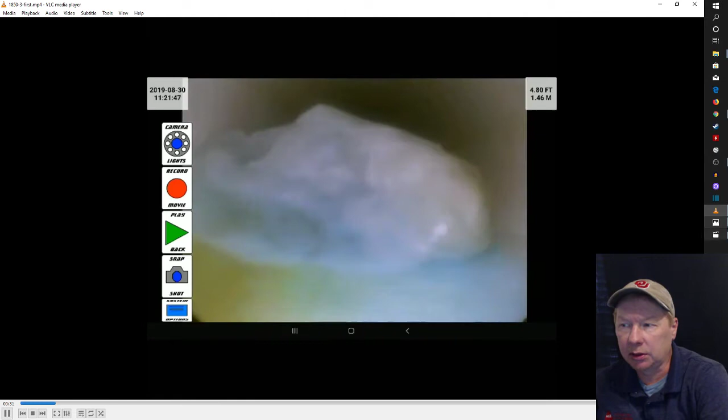Initially, the first thing we see is a little bit of solid sewage sitting in the pipe, which typically shouldn't be there. We don't think too much of it at the time. There's a little bit of water sitting in the pipe too. We go ahead and try to nudge up past it. So we see water sitting in the pipe, which probably shouldn't be there. As we get to this first cross fitting, there's water standing there.

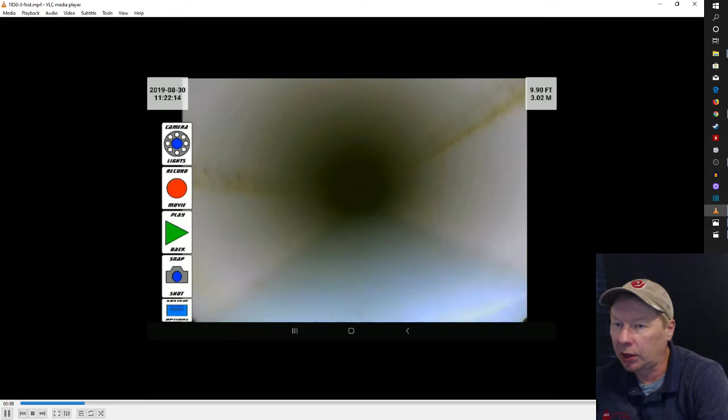As we move on up the pipe, you can see what a normal sewer line should actually look like. There shouldn't be hardly any water sitting in the pipe itself as we get up here towards what's going to be the second fitting. We're right about in here. You can see the water gets mostly out of the pipe. This is what a sewer line in good condition with good fall should look like. There shouldn't be any water standing in the bottom. The blue color of the water kind of gives us a really good indication of how much water actually was sitting in the bottom of the pipe.

So here we are, second fitting, looks pretty good, headed up towards the back.

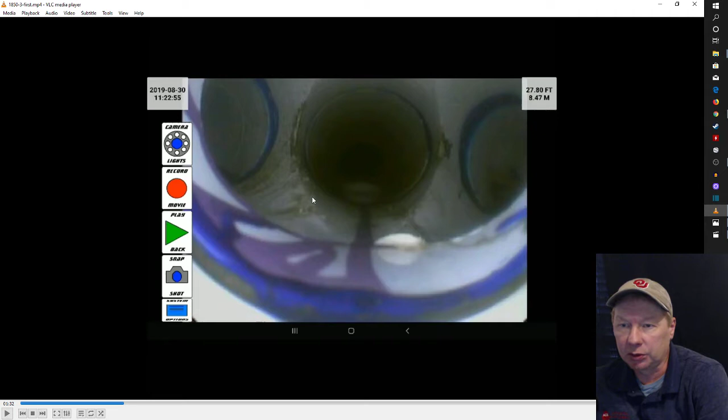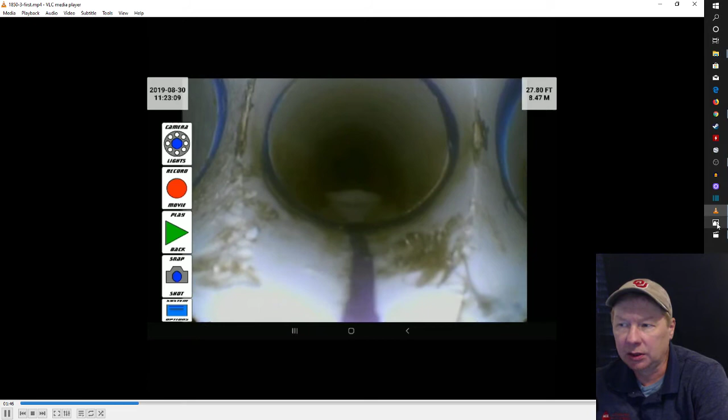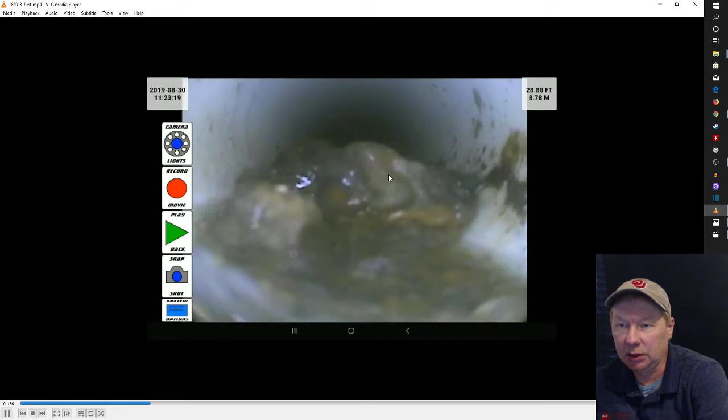As we get to the third fitting, here we are at the third one, right here. We can see it's been a little chewed up, and there was some question as to what that was. I feel like after it's been rooted so many times, that pipe is getting a little bit of chew marks in it, which really shouldn't affect anything. And I don't feel like we're seeing any effect from this, because if we go up past this third fitting, up here in the area where there isn't actually any water running through it or sewage, what we're seeing is a pretty big pile of solid waste back up in here.

So that really shouldn't ever be any water up here. You can see the water flows through these and heads out, and this is just the cleanout in the back, the only place that actually goes to.

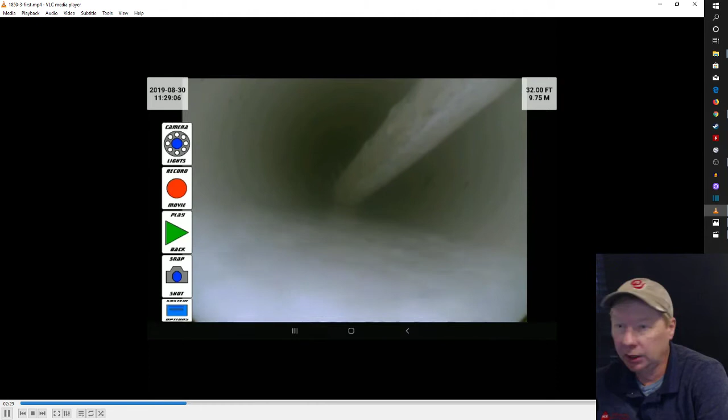So what we do is I physically go around to the back and run a hose through it to try to knock some of that solid sewage loose so we can actually see what's going on. There's my hose that I use to run down pipes. You can see we've run a bunch of water through it, trying to clean it out so we can get a better idea of what's going on here.

As we finally get it cleared out most of the way, you can see we're back at the fitting, and what we do is go ahead and flush the commode, and it washes out quite a bit of paper from that side.

It's kind of got to the point here where we can see not very much. We're thinking maybe the camera head is even causing some of that paper to stop up in the pipe here. So we go ahead and take it out around to the back cleanout, where we're going to actually physically remove it from the front and put the camera head into the back cleanout right there.

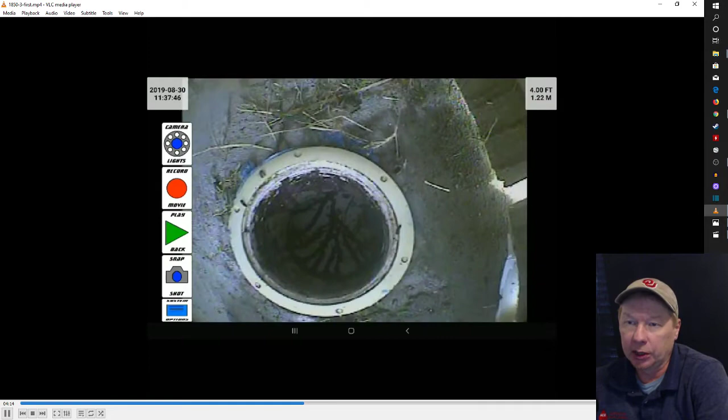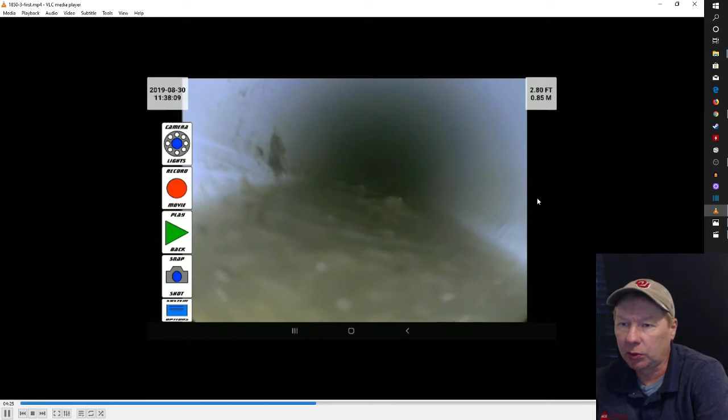So here we are at the back, headed into the cleanout. Again, headed downhill from this side behind that fitting that we're having the problem with. And we can see there's quite a bit of still heavy water, if you will, raw sewage and paper.

So I go ahead and run some more water to try to rinse that out and give it a couple of pokes with the camera head to get everything rinsed down. Again, the spot we're running the water from is in the back, and we're at the back cleanout with the camera head looking forward this time. So we run some water, try to get everything cleared out, poke it with the camera head a little bit to knock some of that raw sewage down that's been standing in the line.

Finally get it to where it's starting to clear out. As the water slowly goes down, you can see I've got it at quadruple speed here. It actually took quite a while for the water to finally clear out of this pipe. And it slowly goes on down.

We wanted to have a completely clean pipe, no stoppages, no sewage sitting in it, so we'd have a good fresh start to try to do a little bit of testing and see exactly what we're up against here. Again, slowly the water goes down. We give it a flush. Slowly the water goes down. And then we wait until it's all pretty cleared out.

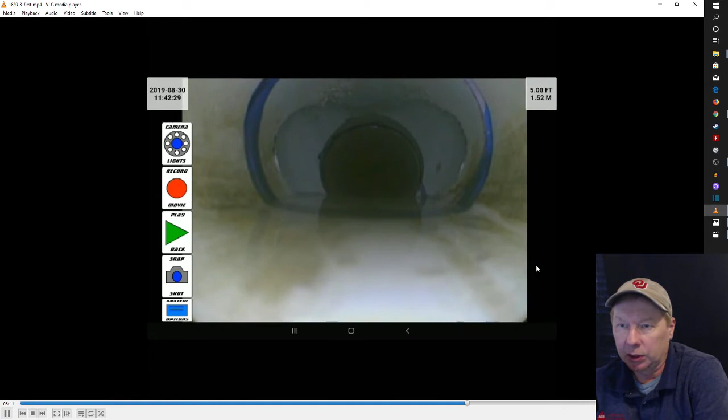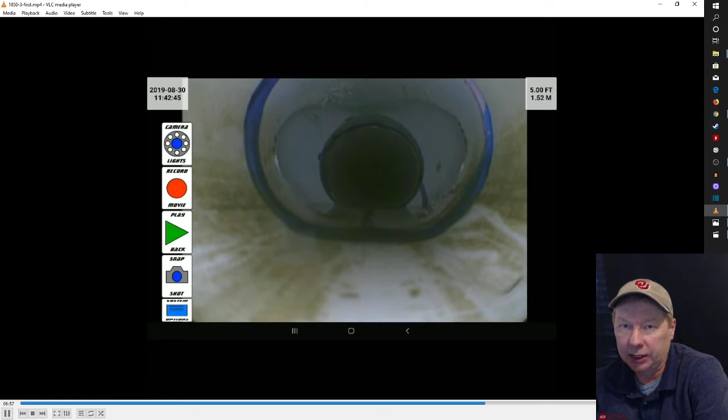So we're going to go inside and start flushing the commode with some paper in it, as a normal flush would use some paper and there'd be some solid in it. So we try to let all the water go down before we start doing our testing.

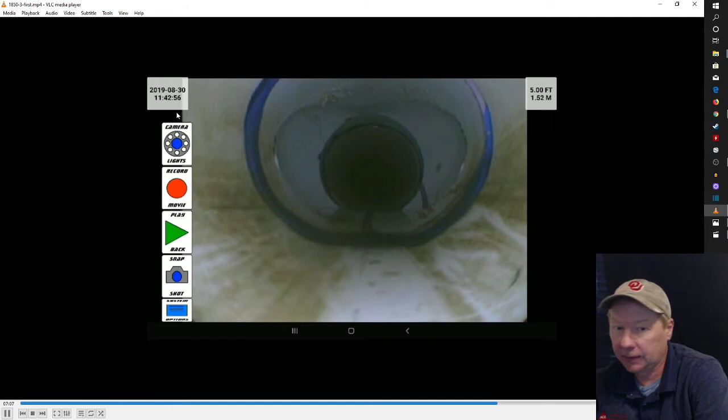It finally dries out and we go inside and flush a little bit of paper. Keep in mind that water coming up, we're behind this fitting looking this way. The water isn't coming downhill toward us, it's coming up that back fitting. This should be the highest part of the sewer system in this building, and there should never really be any water, much less sewage, into this very top part. So what we're seeing is even from behind that fitting, that water is piling up toward the camera and even back behind the camera.

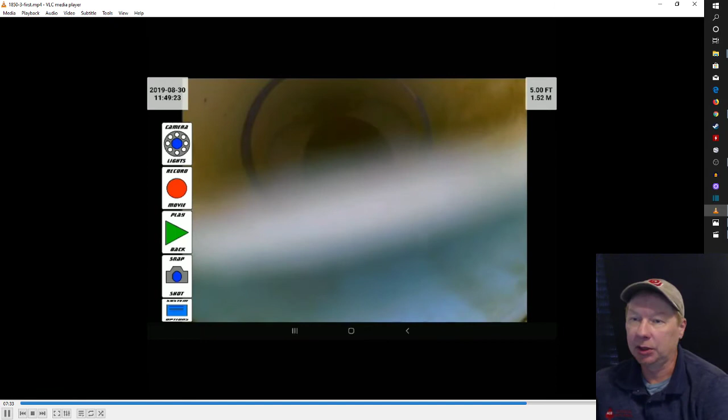As it slowly goes down, you can see I've got this at quadruple speed. It's leaving behind a little bit of raw sewage, paper in this particular case since that's all we flushed, sitting in the middle of that fitting.

So we think maybe we'll flush it again and see what happens. Hopefully it'll wash this paper down if we give it another good flush, as would be typical in a sewer line. If any does stop up there, like at the front we saw, it typically will go ahead and wash on down.

So we go in and give it another flush. After all the water goes down, as would be typical of normal operation -- most people don't flush over and over right after each other -- so we let all the water slowly go down out of it. Again, this is quadruple speed.

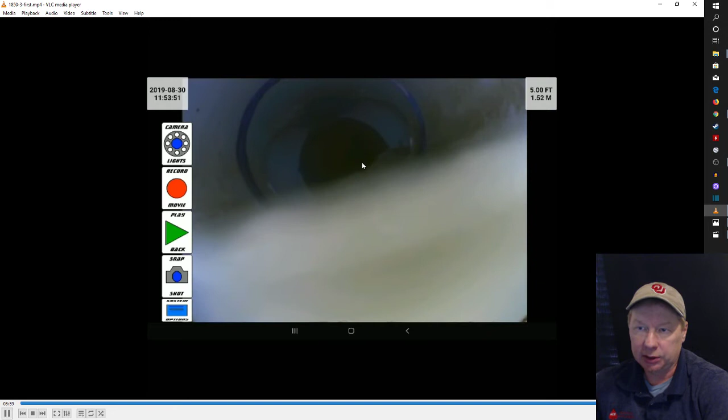So we give it a second flush, hopefully it will wash it down, but instead we actually see more solid stuff caught up in this fitting.

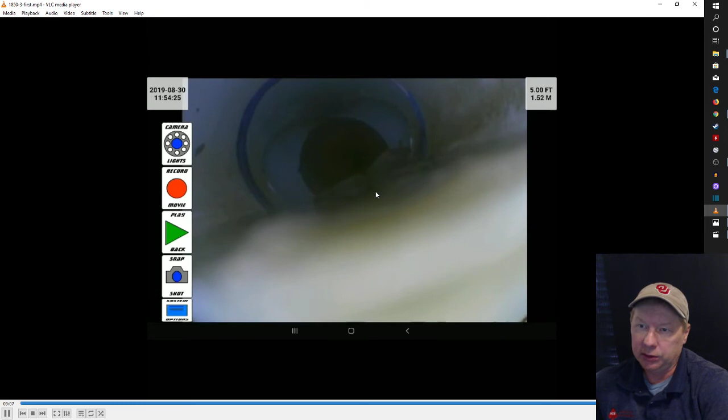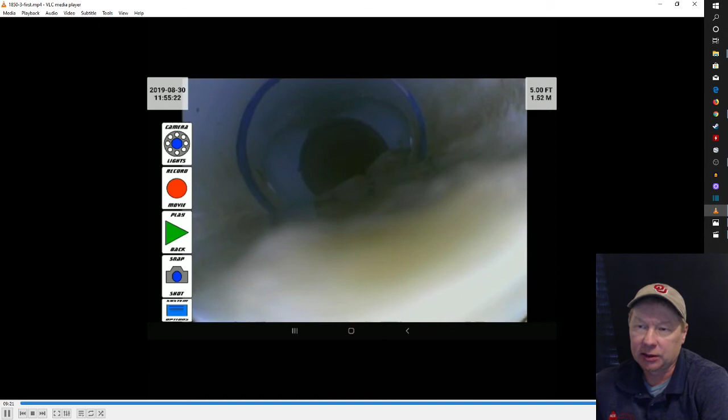So the only conclusion that we're coming to is that this fitting, and possibly the pipe behind it -- again the camera's behind that fitting up here -- we're seeing that both in that fitting and behind it toward the back clean out, the pipe has not got the grade that it needs to let the water run downhill at a sufficient speed to carry all the sewage along out of the pipe and fitting with it.

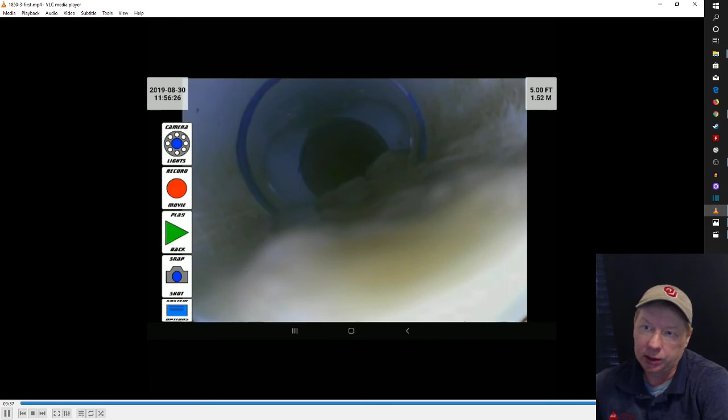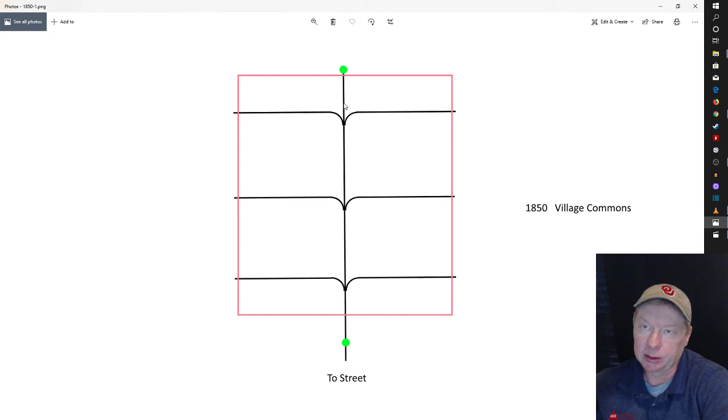So just for the sake of argument, what I've done is put that original shot of this same spot from earlier in the film, where we're going up from the front towards the back of the fitting. Let's cut to that -- this is what we saw originally. Back behind that fitting was the pile of raw sewage that we had to clear out.

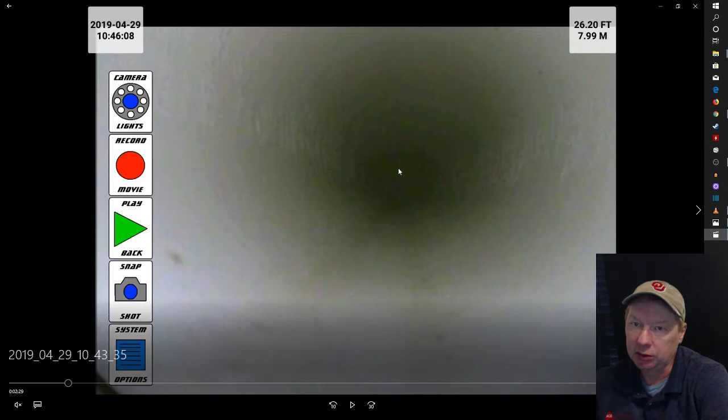Also, when I looked through my records, I saw a previous camera job that we'd done after having to rooter that facility a couple of times. After it backed up about the third time, I came in with the camera just to see exactly what was going on. This is a camera from 429, and we're coming up toward that fitting from the front during a previous incident where it had issues and was completely backed up at that back fitting.

Here's the same fitting we were at before. Ultimately, as that paper piles up because of the grade of the pipe, or lack of grade -- the low spot in the pipe -- it fills the pipe completely. This is looking up into that three-way fitting, and it is absolutely packed with solid sewage.

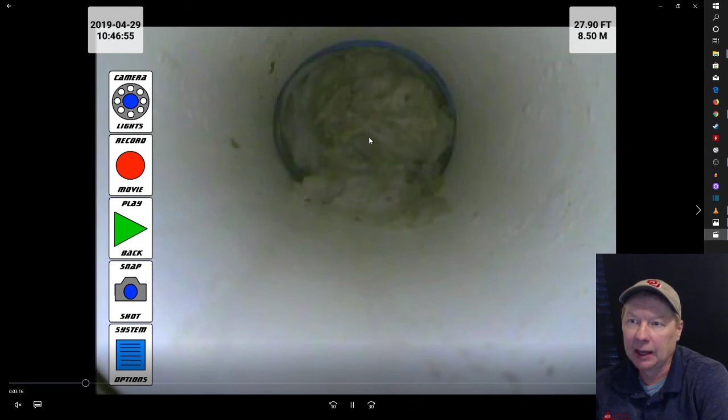This is maybe the third time that we've had to rooter it here on 429, and before we rootered it, we took a camera just to see what exactly was going on. This is a pretty typical incident with this facility, this particular address -- it just has a low spot around and behind that fitting that's not letting the water carry the paper through at a sufficient speed to get it cleared out every time.

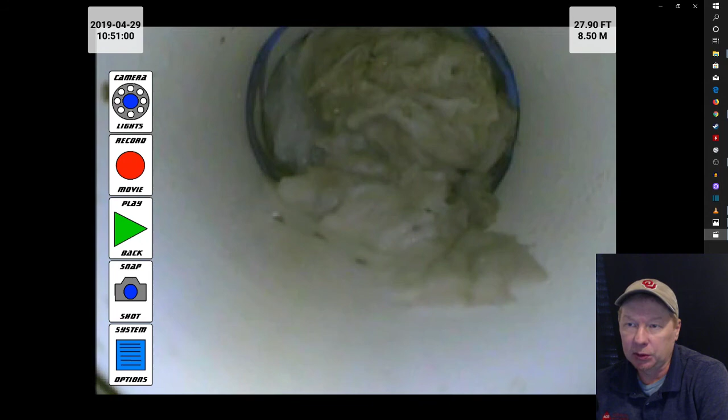As far as a maintenance issue, what I've done in that case, and I believe in this case too, is take the hose and go from behind the fitting and just run water down it. You can see the water start to pile up and come through here where I've run the hose behind it and been poking at it. As far as maintenance, if you do that on a regular basis to keep it flushed out, that would probably go a long way towards keeping it permanently flowing.

As far as fixing it so that issue does not occur again, I don't really have a good answer. It's not something that I would be able to take on as a company ourselves. Maybe some of the bigger companies might have an answer for you on how to permanently fix that issue.

As far as rootering it, it only needs to be rootered when it's completely packed up. Like I say, maintenance with a hose would probably go a long way towards alleviating the condition caused by the problem, which is a low spot in the pipe at and behind that fitting.